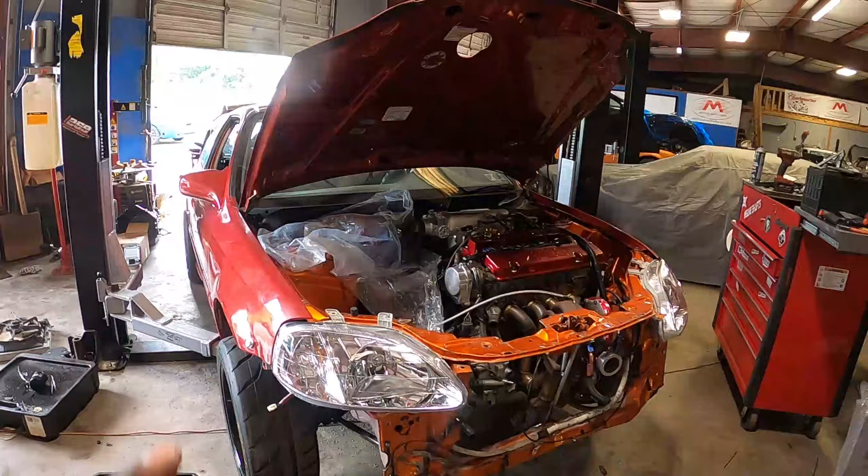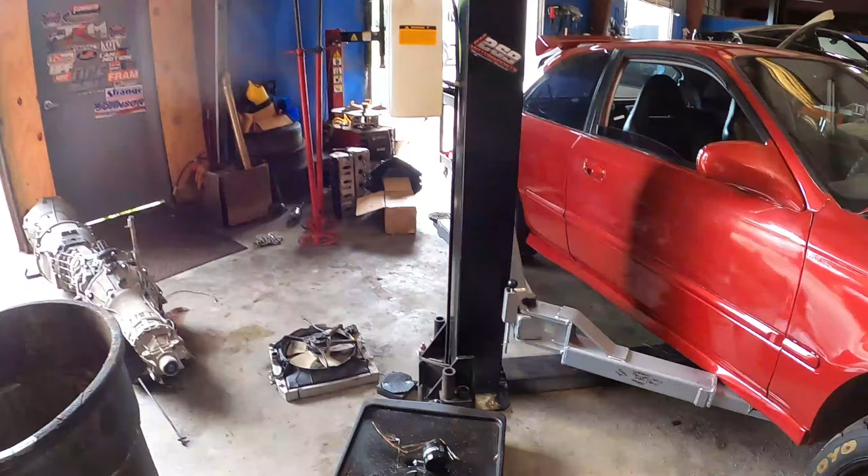Today we're working on this H22 turbo EK hatch. I already started doing some things to it. When the car came in, it had a corrupt tune, so I got that figured out and started the car up. The old radiator started pissing water out of it from somewhere, so we got a Skunk 2 Alpha radiator that I'm putting in the car.

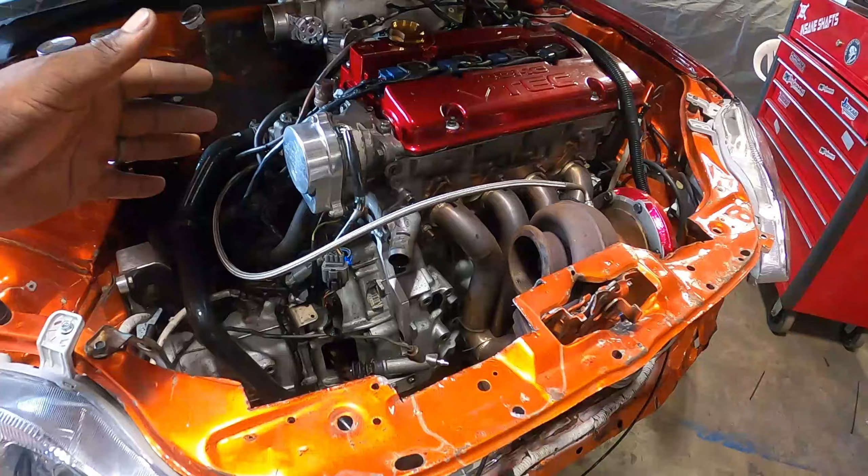I'm modifying the radiator support right now so the radiator can fit further back and have room to clear the downpipe, so the downpipe isn't resting on the radiator and causing the car to overheat.

We also have a Spal fan that I'm putting on the car. It's a 12-inch fan, and I modified the radiator support for it.

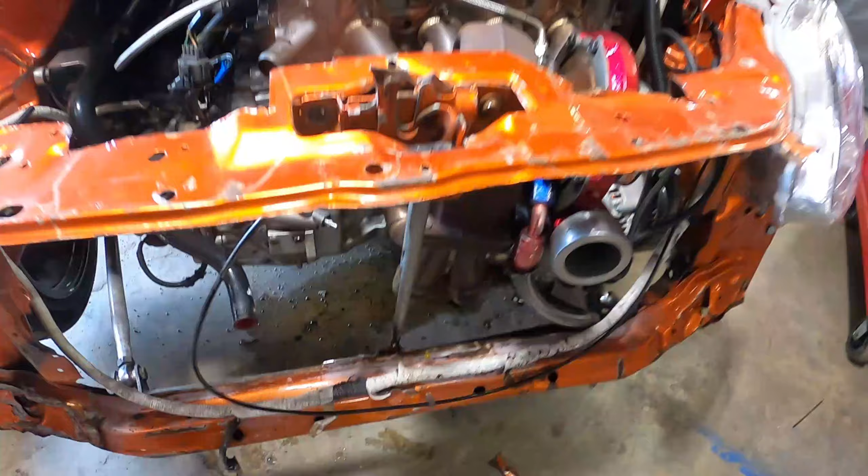I cut out the old support that was on it because it was flimsy and causing things to flex a lot. So I made this little rod that connects the upper radiator support to the traction bar, and I tied the bottom part of the radiator support onto the rod too. So the hood closes perfectly fine now, and you don't have to fight it.

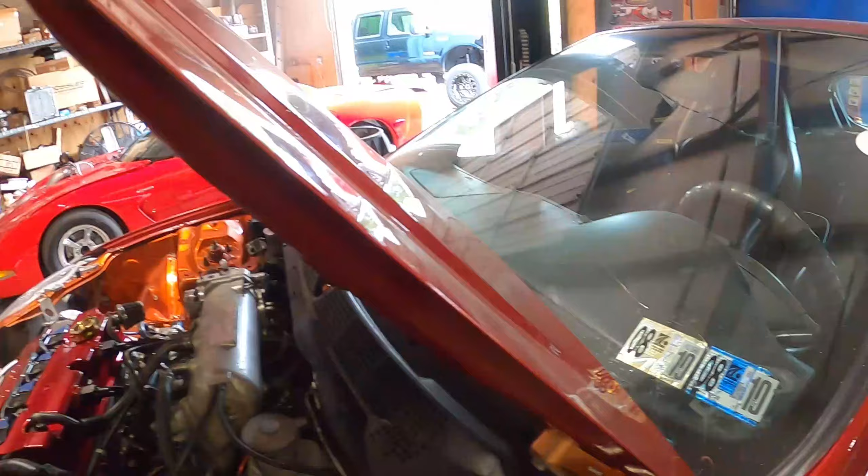I wish I would have started filming some more earlier, but I thought I was going to be on a time crunch today, and then I got alleviated some time.

We're going to get the dyno ready today, and the next video will probably show us starting to do some pulls, because we may or may not go to the track depending on what the weather looks like. It's supposed to be raining around 3 o'clock.

They're having a local small tire shootout at the Test and Tune at Galot today, and we plan on bringing the Grand National there, or John plans on bringing his new car, which y'all will see probably on the same day I release this video.

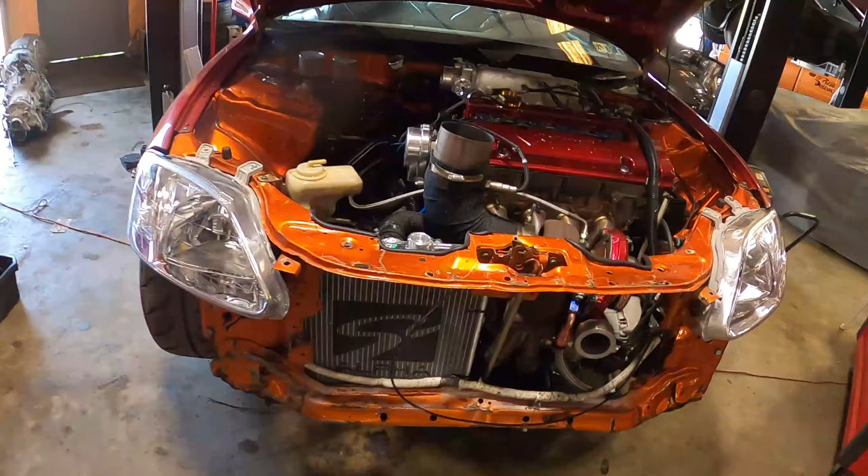All right, so the radiator's in, it's all mounted up and pretty secure. I wrapped the upper radiator hose and the downpipe, so it should keep the heat out of the hose. The radiator is plenty far from the turbo manifold and the turbo, so that's another benefit.

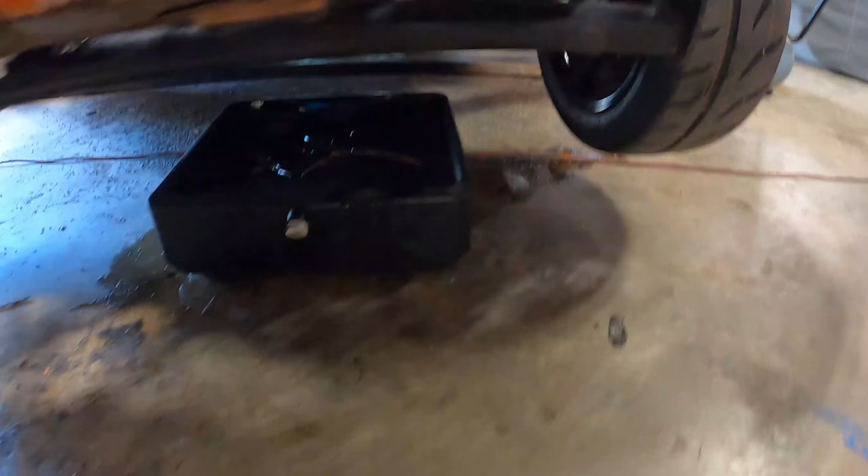I have to unfortunately take the transmission out, because if you look down here, the ground's pretty saturated underneath the oil pan on that side, and that's not oil from the motor, it's oil from the transmission.

I'm just trying to get this car 100% when it gets on the dyno, so it can make easy power. When I give it back to the customer, there won't be any problems, and overall I'm just trying to take care of him so he can be satisfied with my service.

So I'm going to go ahead now, get the car properly racked up on the lift, take the transmission out, and get the axle seal replaced.

Hopefully I can squeeze by without taking the transmission out, and just pull the half shaft out and get the seal out without removing the transmission. But more than likely I'm probably going to have to take the transmission out.

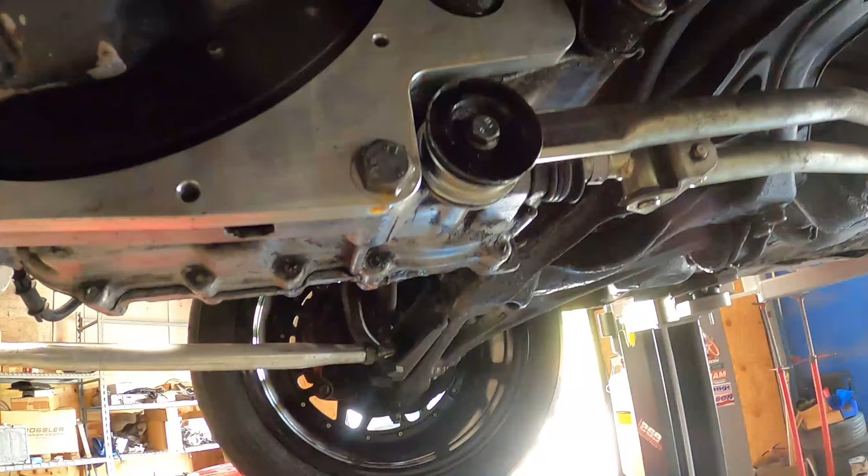So it appears that I am not going to be able to fix the leak without taking out the trans. I'm going to start working on getting this thing out so we can put a new seal in it, put it back in, get it back on, and get it on the dyno.

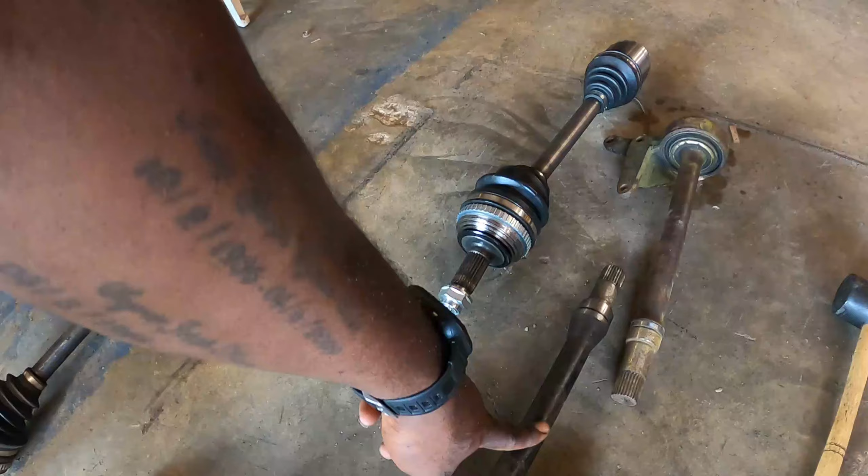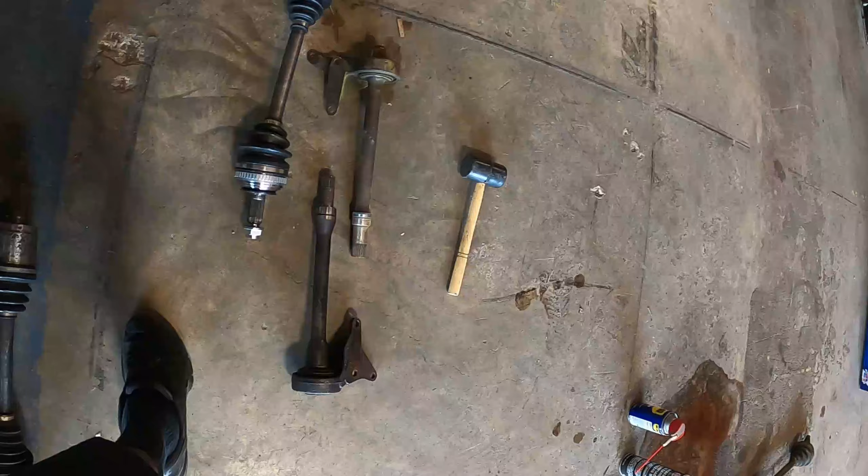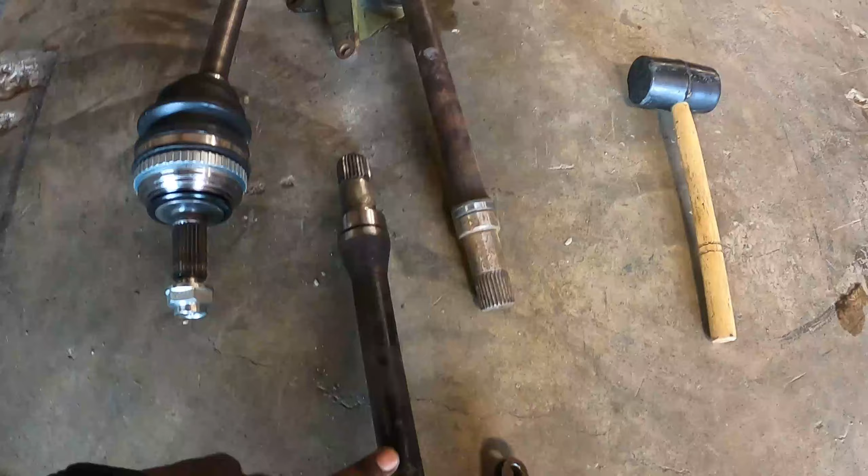Okay guys, so I figured out why this guy was having axle seal issues. Before, he had this OBD0, like an early 90s second-gen Integra, a DA, and they use a different axle seal than the factory B series, like the 94 and up hydro. This is a cable transmission half shaft, and this is a hydro transmission half shaft, and they use two completely different axle seals. So this is the one that he had in the car before.

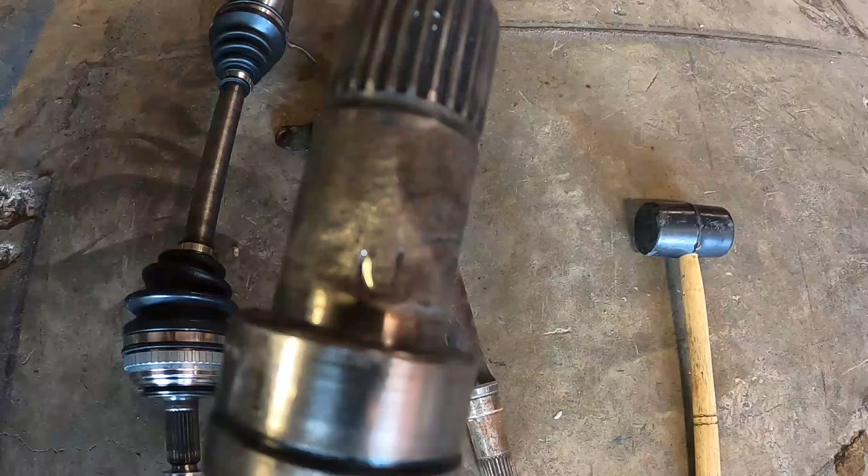Obviously it looks like it's broken before and they modified it or something like that, but other than that, this part right here where the axle seal is supposed to ride was pushing his original seal back inside the transmission, and it tore it up on the diff. So you can see the hydro one is slightly smaller, and it will fit inside the axle seal that's in there.

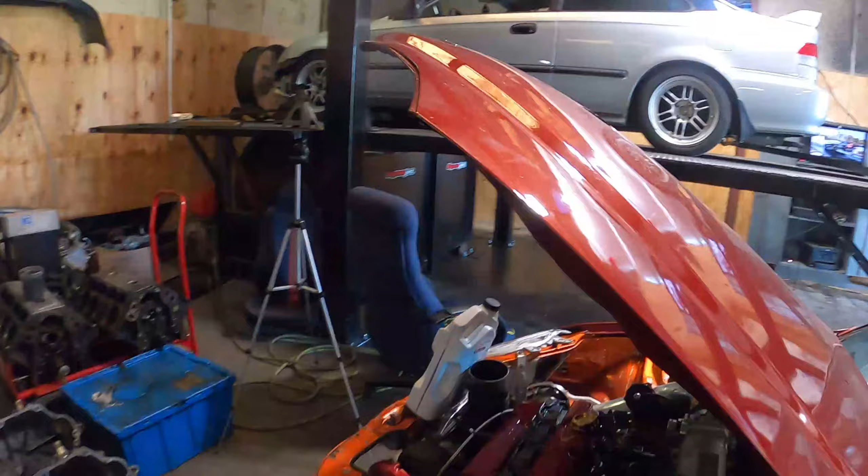So I got the trans back in the car already and stuff like that, and I was just working, I forgot to film, and I got it back all together. I just got to put oil in the car, put the half shaft and axle in. I got to move this single cam off the dyno until his injectors come in, and then we're going to put this on the car and try to get some tuning done.

I got the car strapped onto the dyno. I got a new tune loaded up in it. Got the coolant bled. I just need to verify ignition timing, and then we're going to start making some low cam pulls and eventually get into some high cam pulls.

So it's been a couple days now. I have been fighting a really bad issue with the ignition for the last couple days. So the car had a Honda coil pack retrofit kit on there, and when I would give it more than 10% throttle and pass 4,500 RPM, it would cut out. And I wish I would have got it on video, but it was extremely annoying.

I just wanted to make sure everything was good on the dyno before I started filming. I know y'all want to see all of it, but sometimes trying to film and explain everything and work on the car gets kind of hard, and I told y'all before, I'm always limited on how much time I get to record and work on stuff.

So let me tell you about the trials that I went through. I changed the fuel filter, thought it was that. Took the injectors out, cleaned them, thought it was that. Checked timing, checked wiring, fixed a bunch of wiring stuff because some of it was crimped or just electrical tape together. None of that fixed the problem.

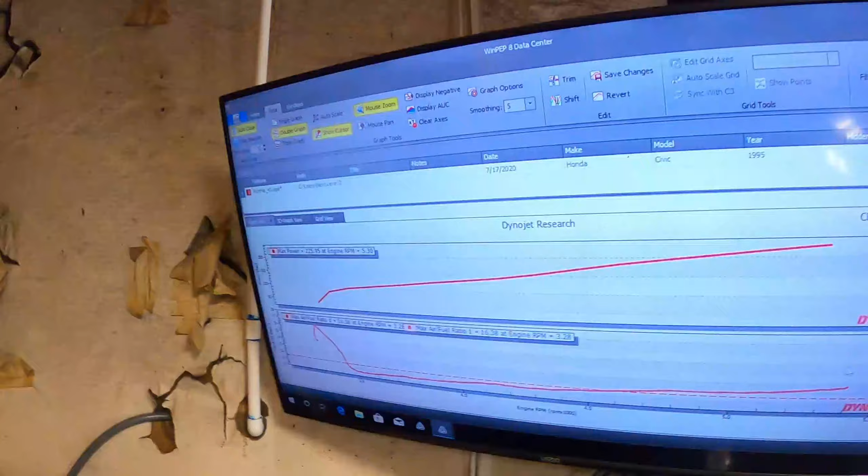So now we're back on the dyno now, and I did a first pull on low cam. It started out rich and then it leaned out. The fuel started running away, and this is what we got. We got 225 on, I think, about 10 pounds of boost on low cam, only revving it out to about 5,400 RPM, and as you can see, the fuel is still running away.

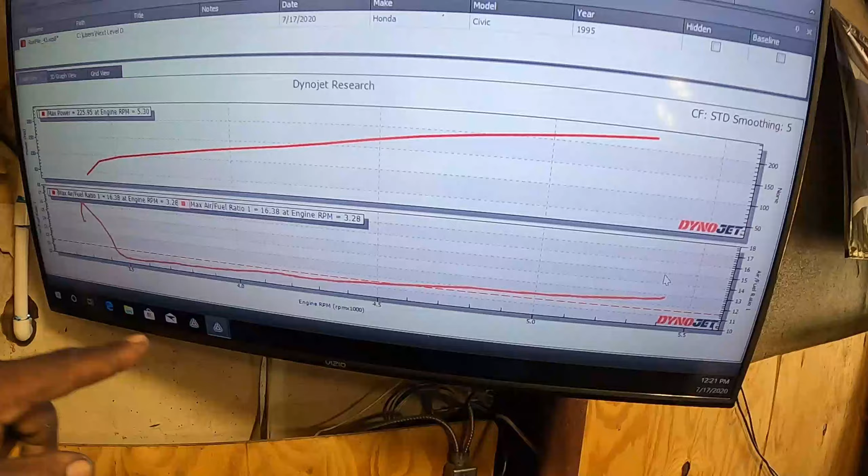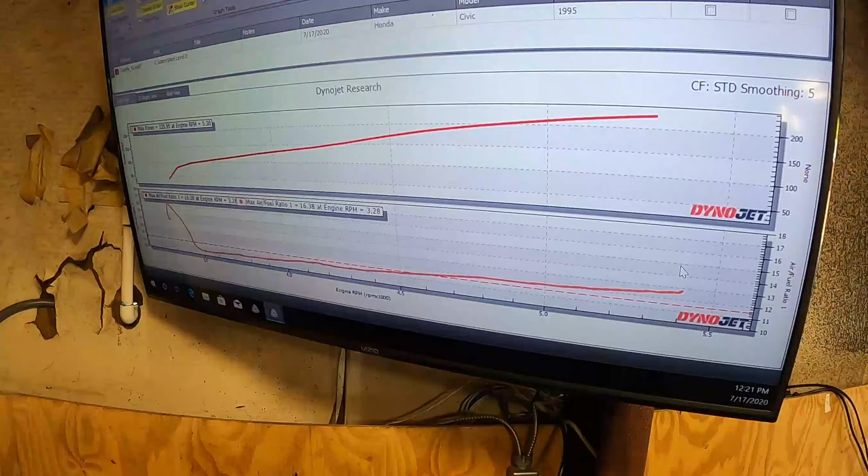So this is about, on 10 pounds, it is a sleeve motor. It's about 19 degrees of timing. I'm probably gonna add another degree and see if it picks up or it goes away, and I'm gonna richen this up right here, and I'm gonna lean this out. I'm still working on the fuel table.

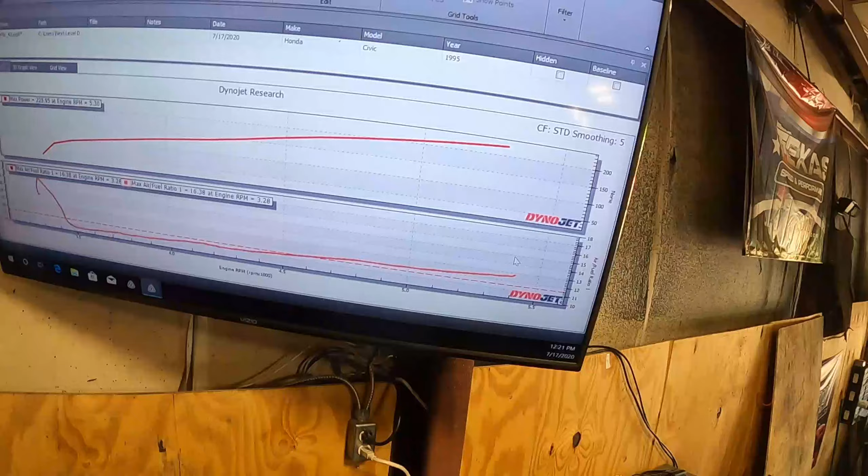Before it came in rich and then started to run away, that means I figured out where my fuel curve needs to start. So I already built the new fuel curve for it, and I'm about to make my second hit on the dyno.

So I filmed one low cam pull. I just kept working at it after the fuel kept running away. For some reason the boost controller is making the car creep on low cam, so it was hitting about 16 pounds at one point. So when I saw that, I stopped recording. I fixed the issue.

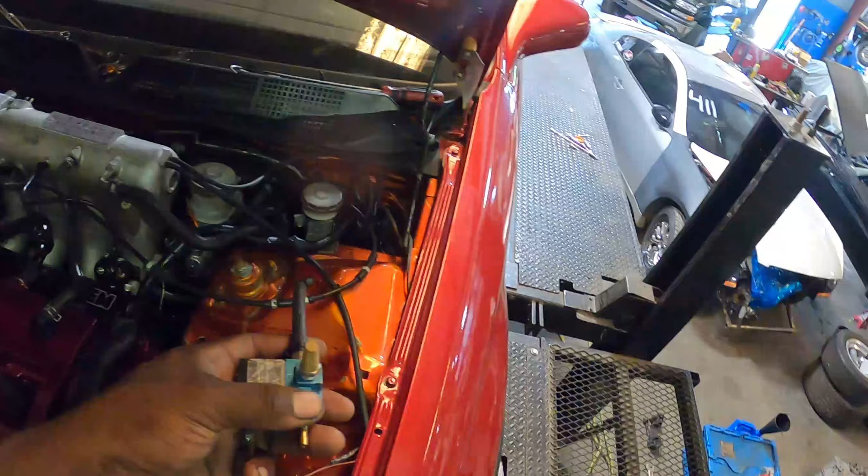The vacuum pretty much was teeing into the boost controller, which sometimes it works and sometimes it doesn't. So I just did a straight line to gate, which gate right now is about 13.5 pounds. I'm gonna keep doing gate until I get to, well, on the next pulls I'm going to do high cam.

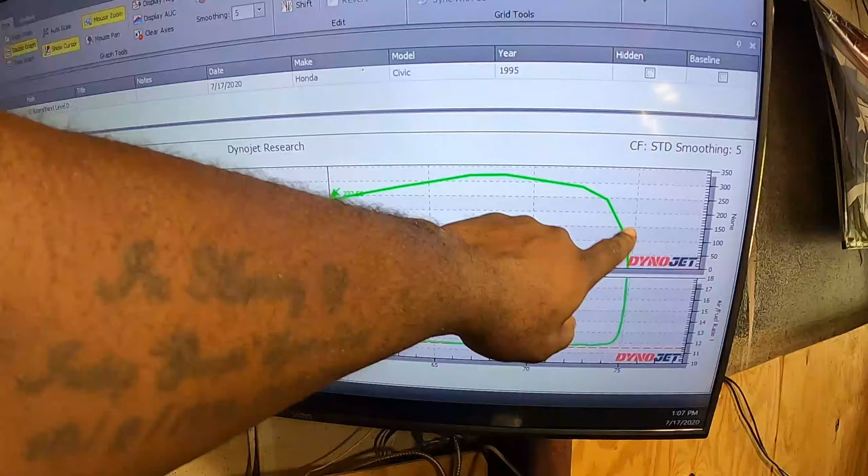Which should probably make about 2 more pounds in VTEC and make drop boost. It made 325 on high cam. It is falling off at about 5,200 RPM, which is about where I'm gonna enable VTEC.

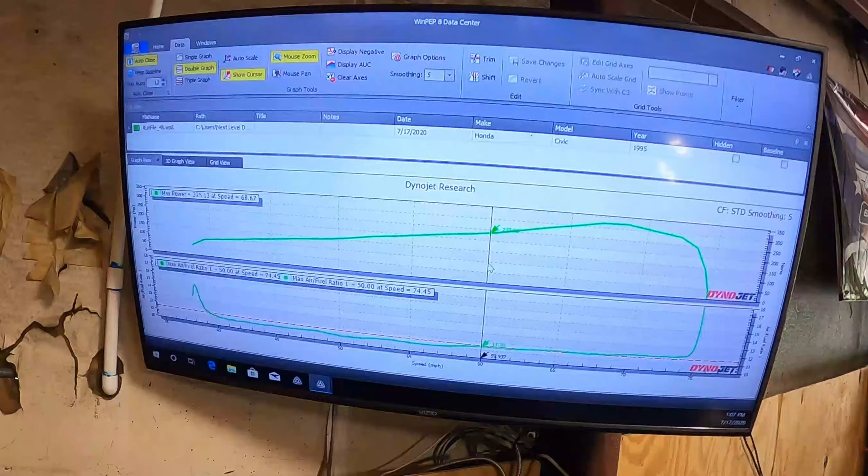I am doing it by speed right now because the RPM is doing some weird stuff on the dyno, so it's showing like it's hitting like 40,000 RPM. So I'm gonna let the car cool off.

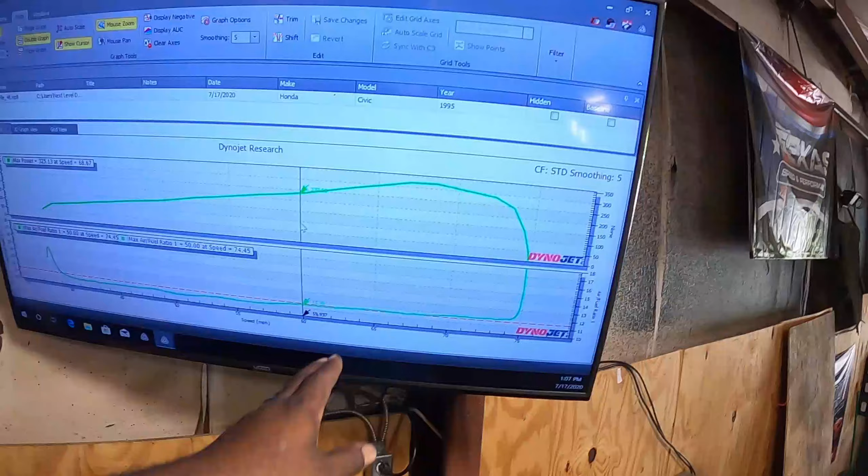I do need to gap the plugs down because it was breaking up on this hit towards the end some. It has NGK Iridium 8s in there, but I think I only gapped them to about 28 because I thought this thing was going to be on low boost.

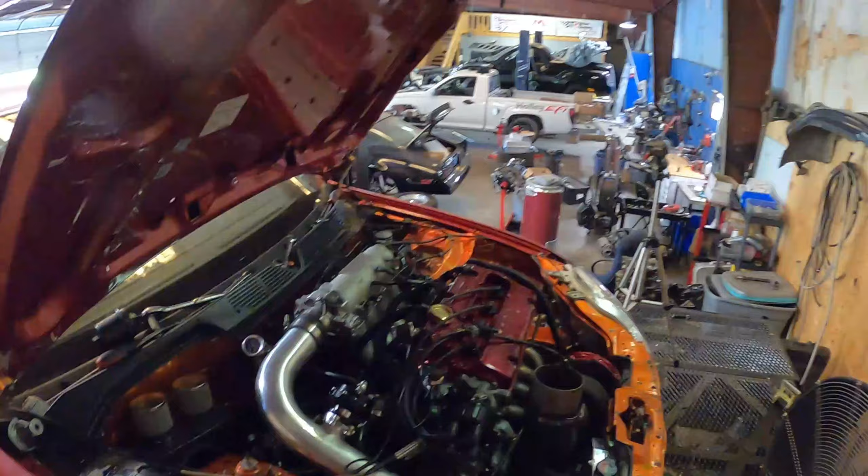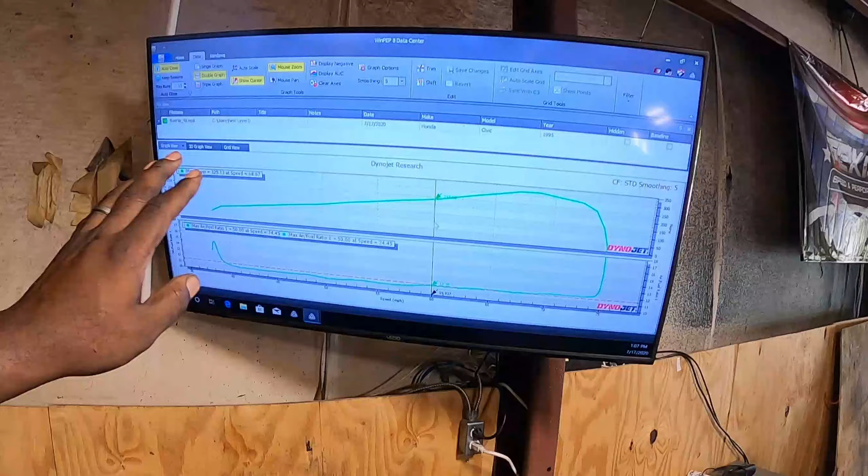Wasn't really planning on trying to make a lot of power, but the car probably should make about 500 horsepower in VTEC. Or maybe no, I lied, it'll make about 460 horsepower in VTEC. So we'll see what it does make. I really do think it will probably make about 500 in VTEC, but if it doesn't, oh well, we'll just manipulate it with boost.

I do probably need to change the gate spring in there and put something like a 7-pound spring in there, and that's what I'm probably going to do. Let the car cool down, change the gate spring to make sure it's okay.

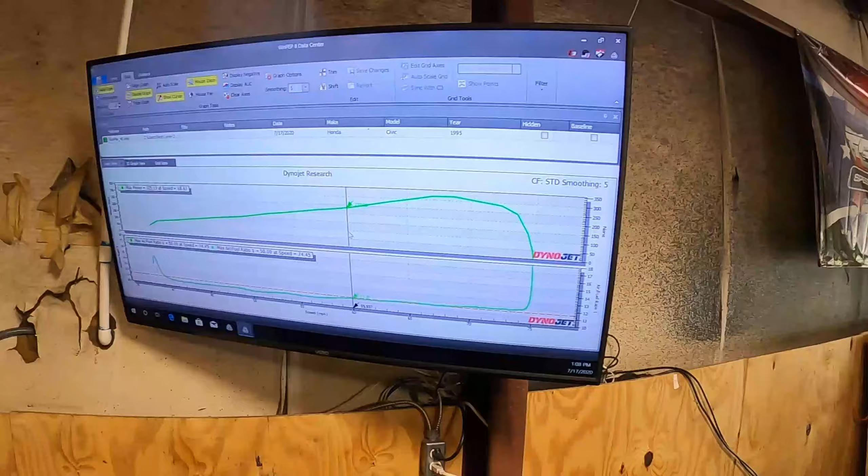I already know that all of this is tuned and compensated to there, and then after that we'll tune VTEC, and then we'll start working on getting the boost control to work so we can do boost by gear. We want to keep it as close to gate as possible in first gear, and in second gear we're going to keep it on like probably 12 pounds, and in third gear we'll probably do 15, and then fourth gear we'll just send it.

Well, we'll send it to whatever it is. So hopefully it should probably be about 18 pounds. 18 pounds on this turbo should probably make about 600 horsepower.

But like I said before, we are limited on what rods are in there. They're Eagle H-beam rods. And if you follow Kyle on Boosted Boys, he had these same rods in his H22. And when his car spiked boost, it bent the rod. His car was making about 650 horsepower at the time.

So I'm trying to give it some wiggle room in case it does spike boost, that we don't run into that error. And it's going to be set on boost cut too, so it's going to have a bunch of safeties on it so that in the event that something does fail, the car will protect itself.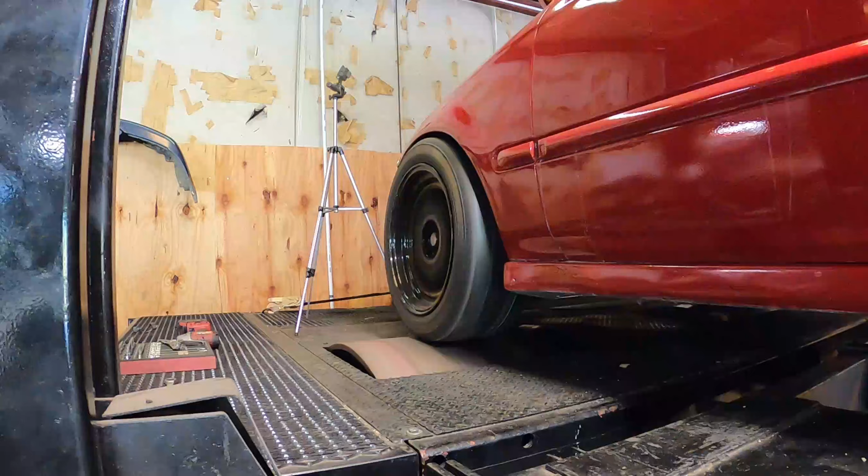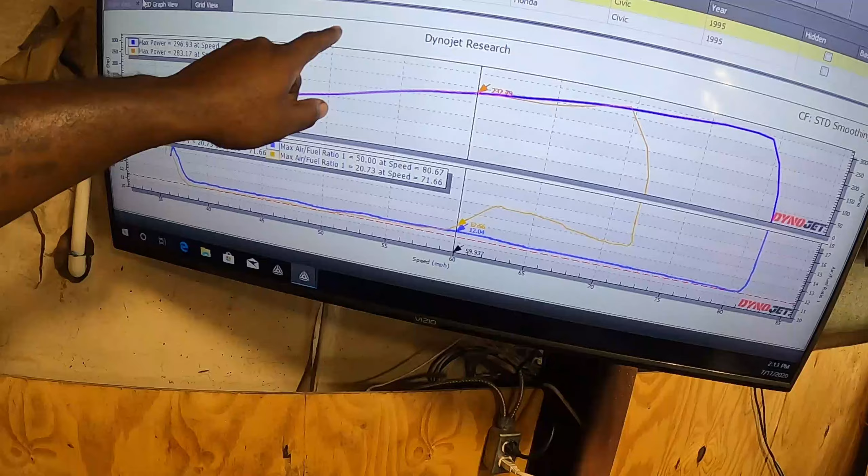Alright guys, so I got it to make about 296 on 10 pounds is what I logged on wastegate. So I changed the wastegate springs out, and I did one VTEC hit and it leaned out as soon as it went to VTEC, so I let out. I'm about to put some more enrichment in VTEC and then make another pull.

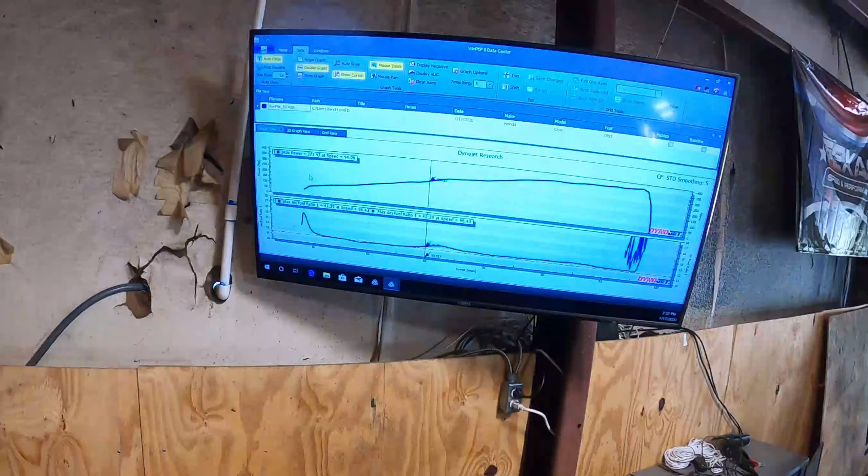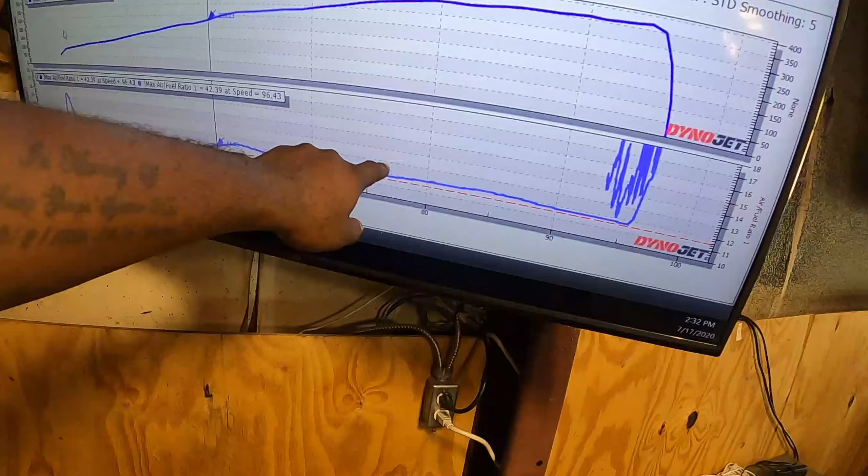Alright guys, so last pull was about 372 horsepower. I'm targeting like 11.8 air fuel on here, but the reference line is a little bit lower. So I just did a pump gas car before this one, so it's at 11.3. But the fuel is trimming out at the end. I just need to clean up here a little bit and it'll be pretty much on the money.

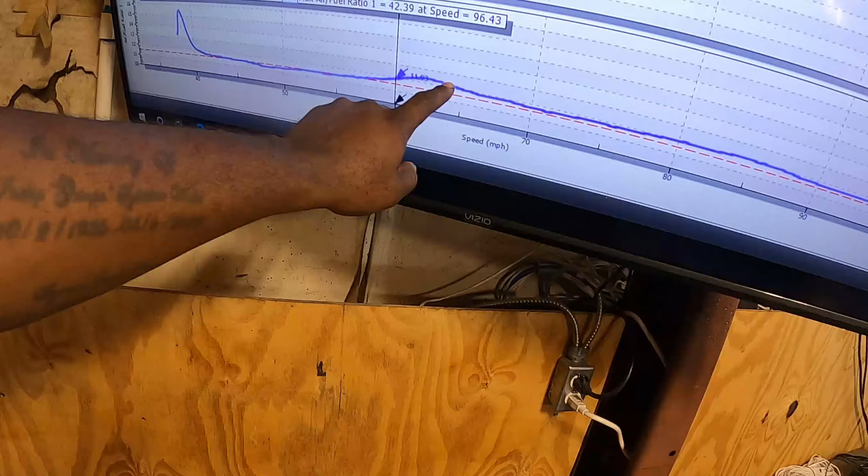I'm gonna cross it over in the VTEC. It's about like 11.9, 12.0, which is fine. And then the power band really carries. It does make pretty good power, and this is on 10 pounds too, so we can double the spring, which is about 20 pounds, but I only plan on making about 5 more pounds on it.

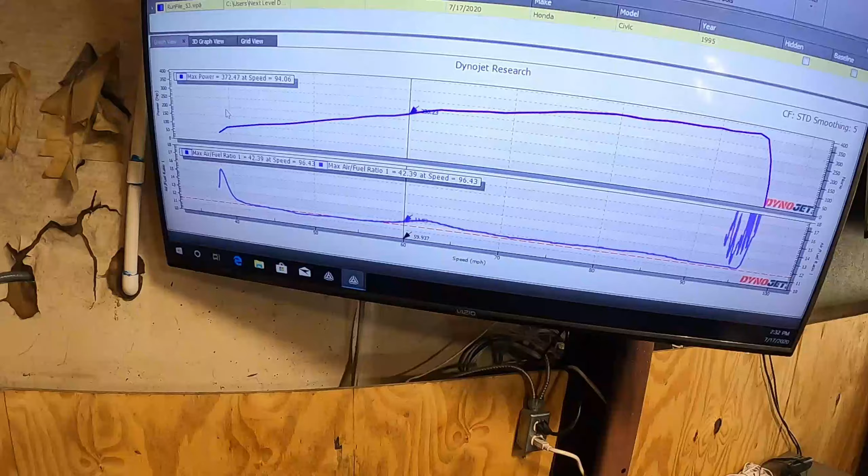So what I'm going to do now is I'm just going to trim this out. I'm not going to make another hit on the 10 pounds. I'm just going to hook the boost controller up and then try to get the boost control tune as close as possible. Well, try to figure out the boost controller, I should say.

20 minutes later. So I've been messing with the boost solenoid for about the last 20 minutes, trying to get it to pulse so I can test it, and it is not working. So I swapped it out for another one, still not working.

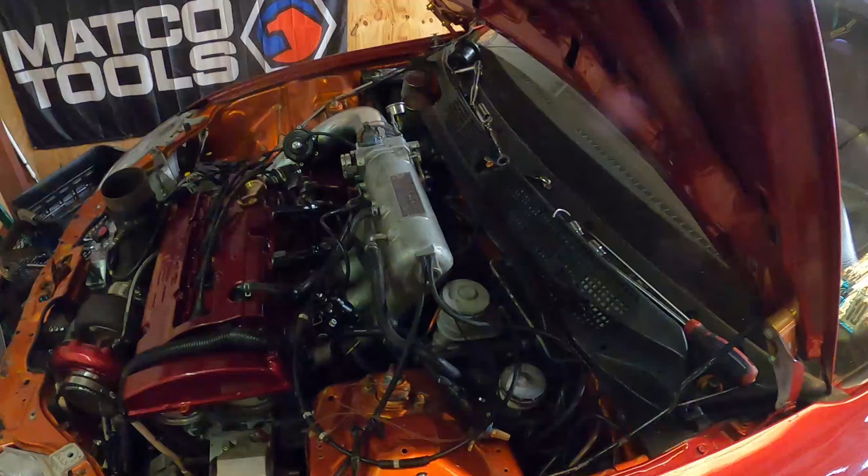So I'm not sure what's going on, but I'm probably just gonna put a T in between the wastegate line. Damn, this thing is even hot, so I don't understand how it's not pulsing.

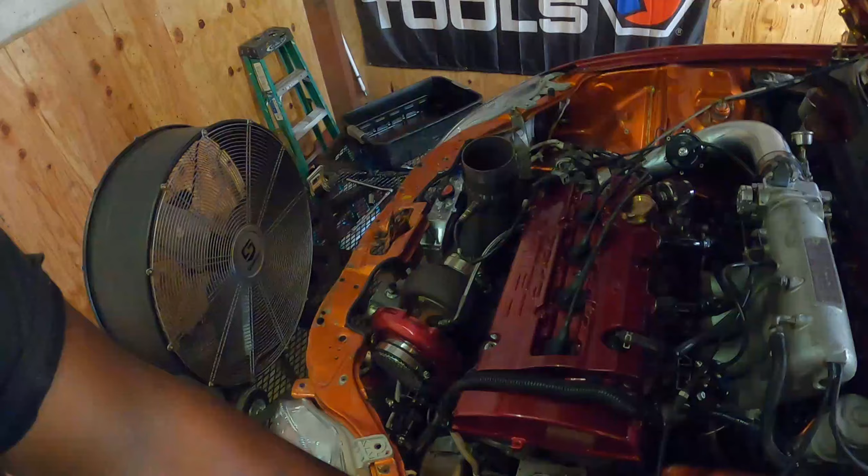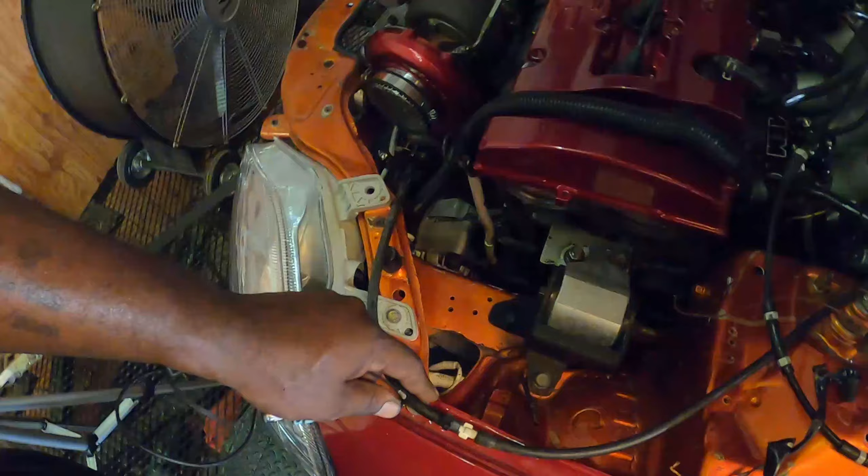So yeah, I'm just gonna put a T, take this connector out, put a T in between it, and see how much boost it'll make on that, and then we'll just leave it at that. I'm not trying to go into too much of trying to figure out what's going on with this thing right now, because I have a ton of time in this car and really don't want to keep billing them for hours of time trying to get this figured out, and he's trying to come pick it up tomorrow too. Tomorrow is the only day off. So I am going to just put the T in there.

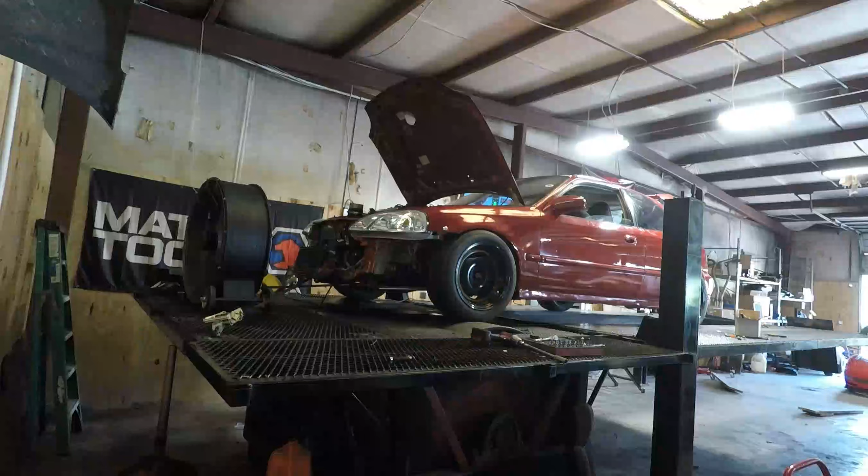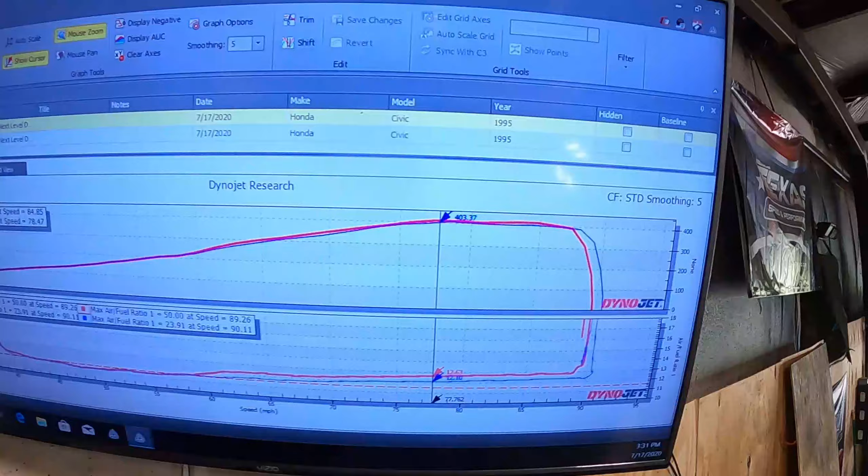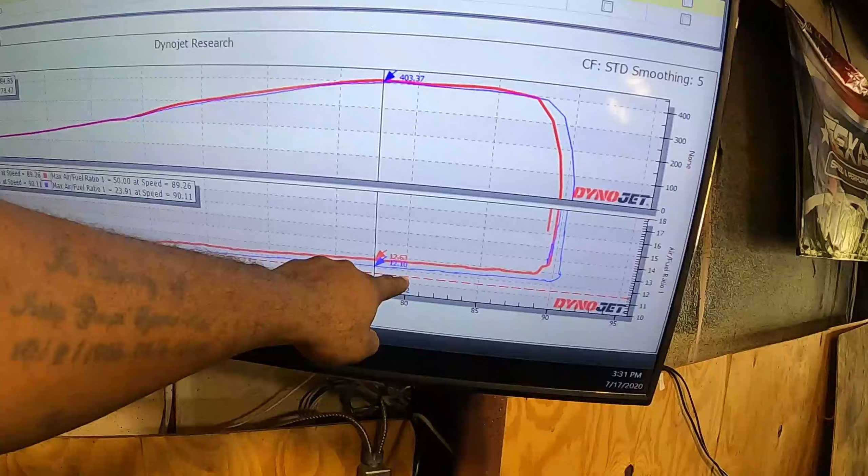Last pull, it made about 406. The pull before that, it made 415. But for some reason between here and here, I'm having a really bad ignition breakup. Even if I richen it up instead of leaning it out - before it was 12.6, now it's 12.1 - but it's still, the fuel is still running away some.

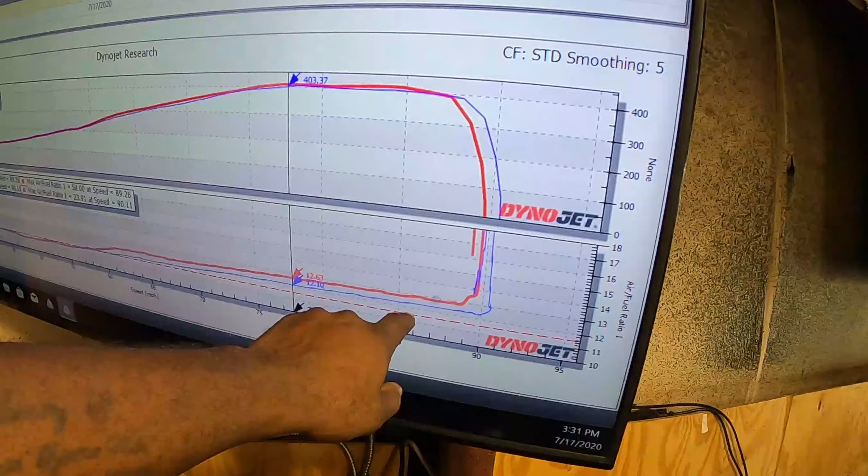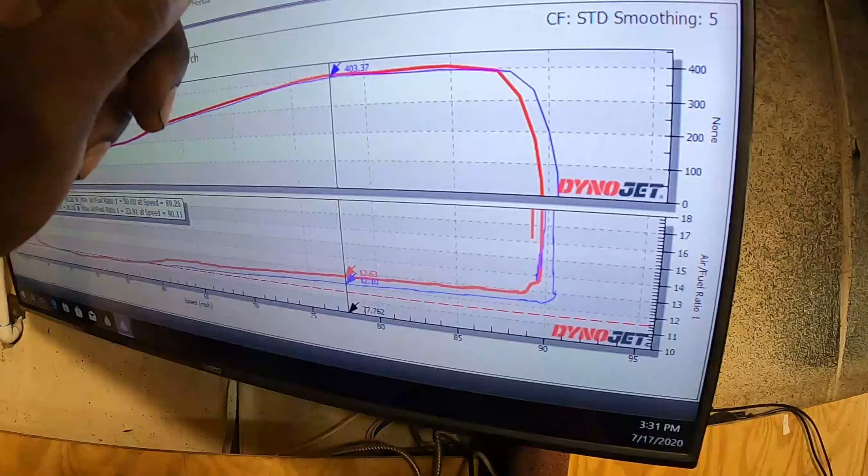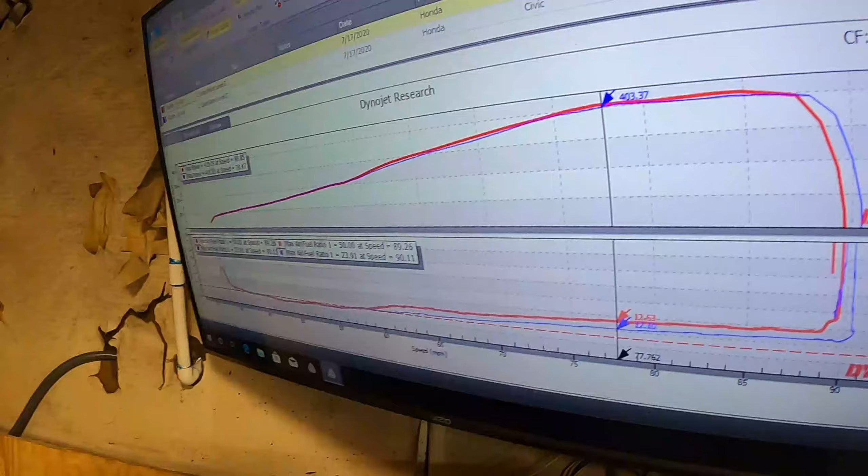So what I'm going to do is gap the plugs down a little bit more. I already added some fuel, and I messed with the ignition timing - I pulled some timing out to see if that would help, but actually no, I left the timing alone, because it's only at like 14 pounds right now and it has 16 degrees in it, which is probably my problem on the 85. But I'm gonna actually put like a degree back in it and see if it clears up. I'm also gonna check the plugs, pull them out, gap them, and see if that solves the issue.

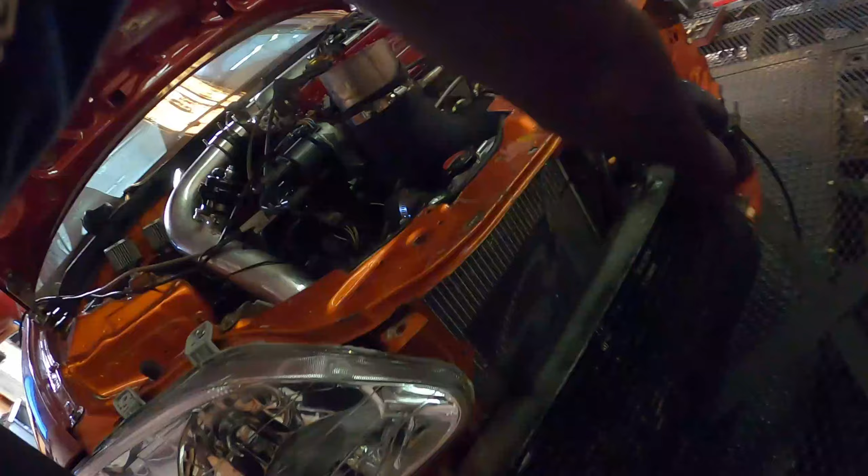I also noticed that the intake air temps are getting up there, so maybe we are reaching the limit of this intercooler, because yeah, it is. Yep, that's a problem. This intercooler is really hot on the other side.

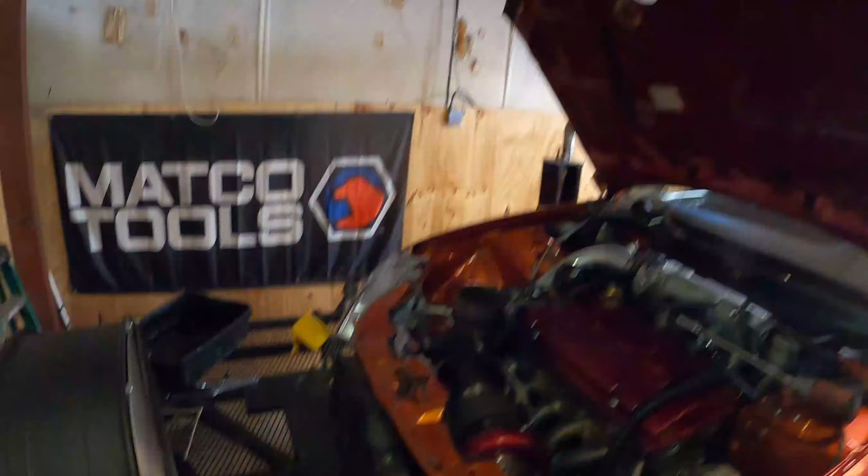So because I did have the fan on it, I turned it off. Let me see, I'm gonna let it cool down all the way. I'm gonna put another fan on the intercooler, gap the plugs down some more, and make one more hit, and see if it picks up and the breakup clears out. Like I told him before, the intercooler really is inefficient, and we are probably at the limit of this intercooler. It's really small, it's really short, and it's not thick enough. It's like a 3-inch, but the fins aren't - there's not enough surface area, I should say, on the intercooler. Normally this intercooler should cover up about this entire front end, but it's super short.

Going to do like I said before, and then do one more pull, and that'll probably be it for the rest of the day.

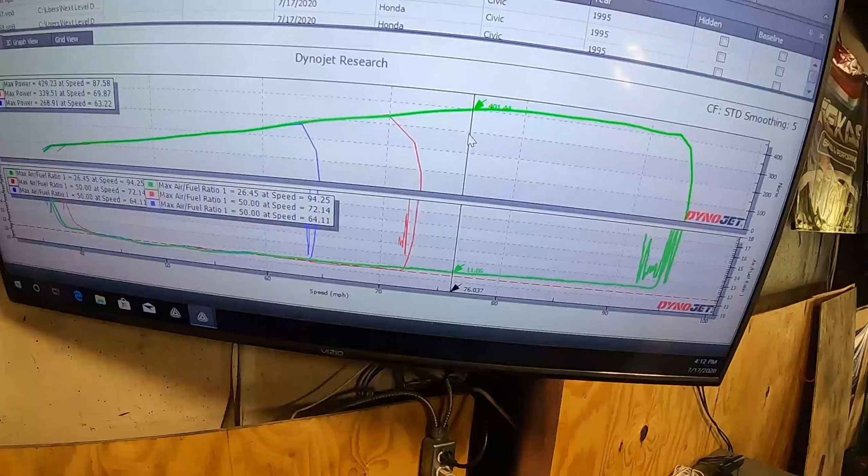So the final numbers we end up with are 429. Don't mind these two, I think the car is out of gas. It says it has half a tank in it, but when I first got the car it said half a tank, but I had to put another 5 gallons of gas in, and it was still saying half a tank. Then it went to full, and then it went back down to half a tank, and now it's at like a quarter. So tomorrow I'm just gonna go get some ethanol, and turn it up a little bit more, but the fuel is stretching out - it isn't running away though, which is the weird thing.

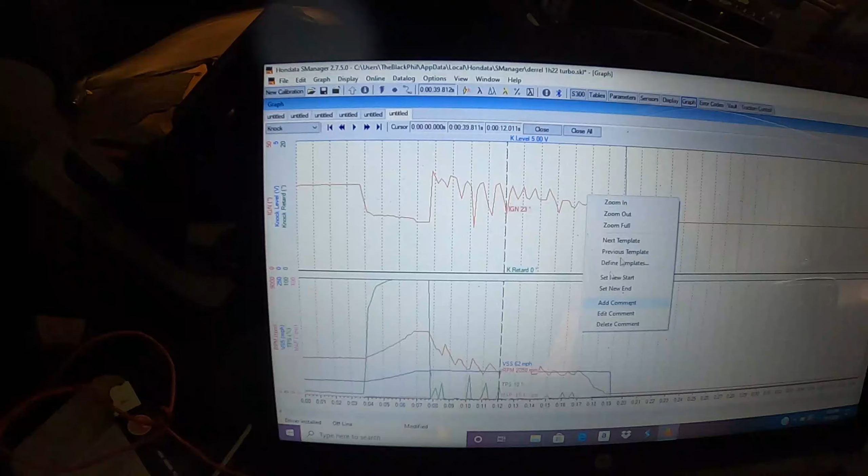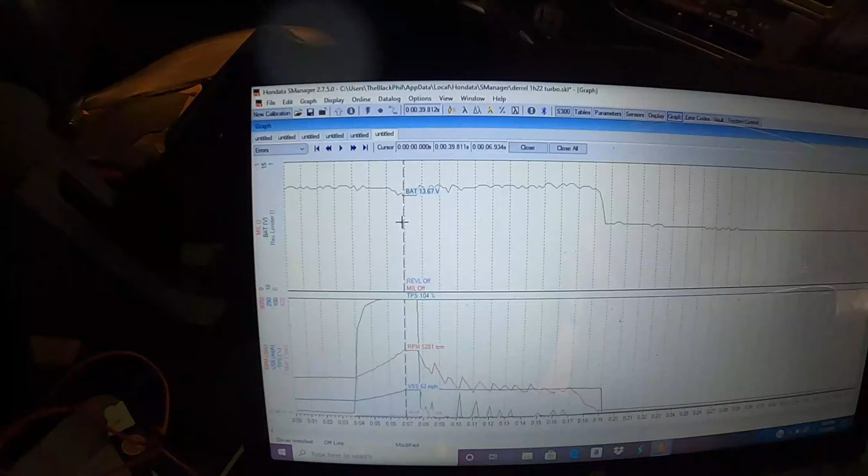Also on the data log, it's showing that it just goes flat. The pull that y'all just saw, on the data log you see it just zeros out, basically goes flat line. So I don't know if the car is losing power, losing voltage, or what. Let me see. I mean, battery voltage is pretty normal, 13.7. So I don't know, I'm gonna try a couple things tomorrow, see if I can get it into the 500 range, and it should be good to go from there.